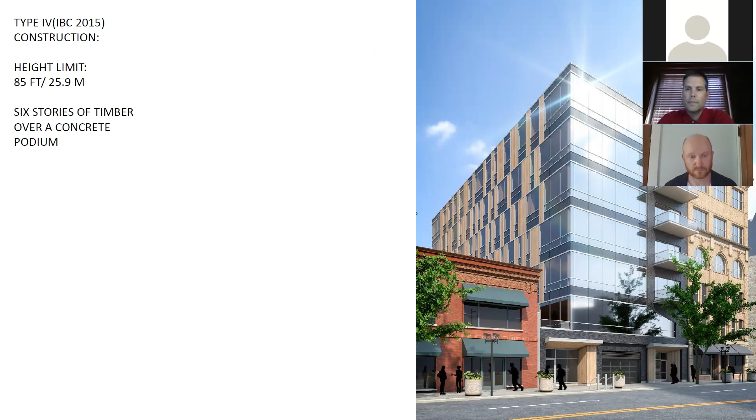In Canada, currently the tallest mass timber building in North America is Brock Commons, which is 17 stories of timber over a 1-story concrete podium. The stair and elevator cores are cast in place. That was a concession to the code officials in Vancouver. And basically, the way that Brock Commons got approved is that the timber is all wrapped in 3 layers of drywall, which we find to be less than an ideal solution because you can't actually see any exposed timber in this building.

The tallest mass timber building permitted in the United States was permitted in the state of Oregon in 2016. And aside from fire considerations, it's in Portland, Oregon, so it was in a high seismic zone. And so we benefited from some of the testing, which we'll jump into a little later, that was performed to get this project approved, and we're going to use some of that methodology on our project. Unfortunately, this project was in part funded by low-income housing tax credits, and it was canceled because the value of those credits sort of went way down at the end of 2017.

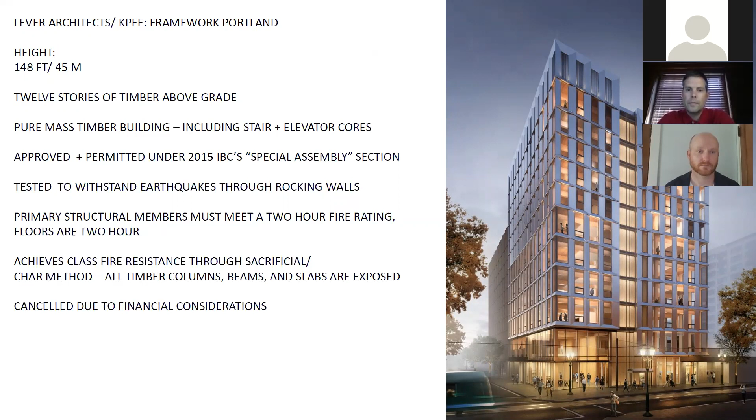Currently, the tallest mass timber building in the US is Carbon 12, also in Portland, Oregon. So this is 8 stories of mass timber, and we'll see some interior images in a moment. This is sort of the precedent that we are chasing in terms of the aesthetics on the interior.

This is the current tallest mass timber building in the world. It's in Norway. Please don't ask me to pronounce it, but it's 280 feet. It cheats a little bit because the CTBUH, the Council on Tall Buildings and Urban Habitat, allows architectural elements such as this crown to be included in the building height. That was added during construction so they could go grab the record.

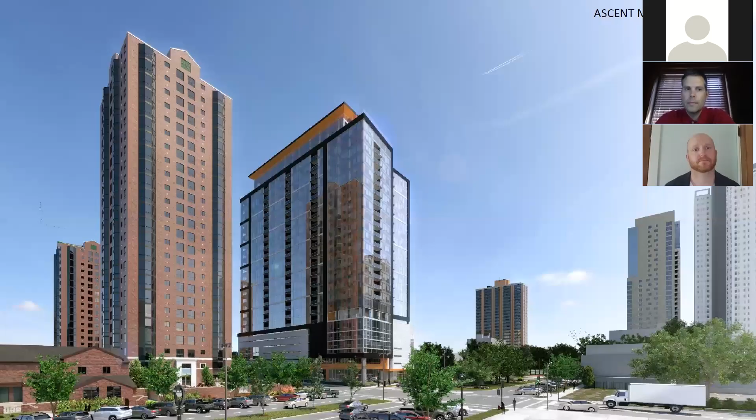And then this is our proposed project in Milwaukee, Wisconsin, Ascent, which is a mixed-use mass timber hybrid tower, total of 25 stories tall, 19 stories of residential, which we will get into, over a 6-story concrete podium.

Yeah, a couple of things that come up immediately when discussing a mass timber project is why. Obviously, there's an aesthetic aspect to it that's pretty much unmatched, which Jason already pointed out, and some of the renderings that you saw already kind of exhibit. But what are the real benefits to building with mass timber? Because there is a cost associated with it. It's not typical construction for what you typically see in this type of high-rise project. Typically you're going to see steel, you're going to see concrete, and we'll talk a little bit later about what the schedule impacts are.

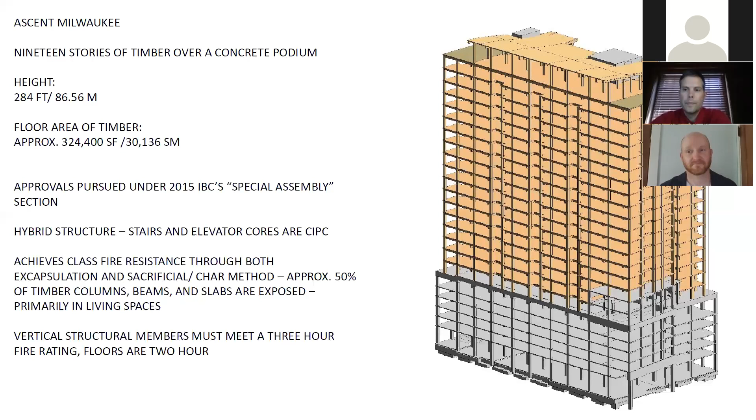And then we do have our 6 levels of concrete post-tension parking, and our core areas, our stairs and our elevator shafts, are vertically out of concrete as well. So when we say this is truly a hybrid building, you can kind of see the progression of foundation, deep piles through concrete to the mass timber. And that's a true hybrid construction.

And as Jason alluded to, similar to Brock Commons and some of the other projects that have these concrete cores, not only is it a structural element that really is quick and helps with the construction sequencing, it also allows for the egress paths from the highest point of the building to be encased in concrete as somewhat of a concession to the AHJs, in that they prefer having that concrete stair and egress path.

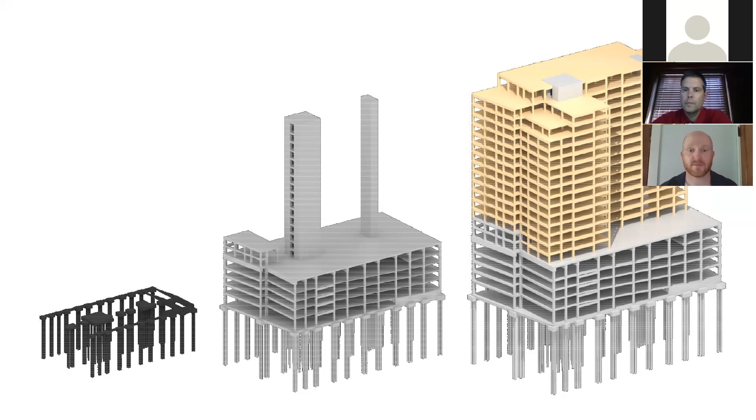There was a discussion at some points of having wood as the vertical shafts for the stairs and elevators, but we quickly went away from that, knowing that it was frankly an easier conversation with the AHJ from an egress standpoint, and from a constructability standpoint, to get our tower crane through the concrete and then into mass timber. Sequentially, it just made a lot of sense to do it this way.

So we'll talk a little bit about the timeline of this project. Our interaction with the AHJs has been extensive. Our firm was directed by the client, New Land Enterprises, to pursue a mass timber high-rise on this site.

They had previously had a 19-story concrete building approved on this site. It was canceled due to the Great Recession. So what we did is we immediately came up with a concept within 60 days from that directive, and then we presented it to the Department of Neighborhood Services Commissioner and the downtown alderman.

Because the Department of Neighborhood Services commissioner is appointed by and reports directly to the mayor of Milwaukee, and his department supervises all plan examiners and all building inspectors. In the first of many cases of the stars aligning, we presented this in May of 2018. We learned that the commissioner has a forestry background and was acquainted with the technology and was an enthusiastic supporter.

So later that year, he directed his staff to start working with us on trying to figure out a path to approval. So we gave our first presentation to staff, summer of '18. The project was still under wraps at that point. In fall of 2018, we unveiled it at the Council of Tall Buildings and Urban Habitat World Conference in Dubai.

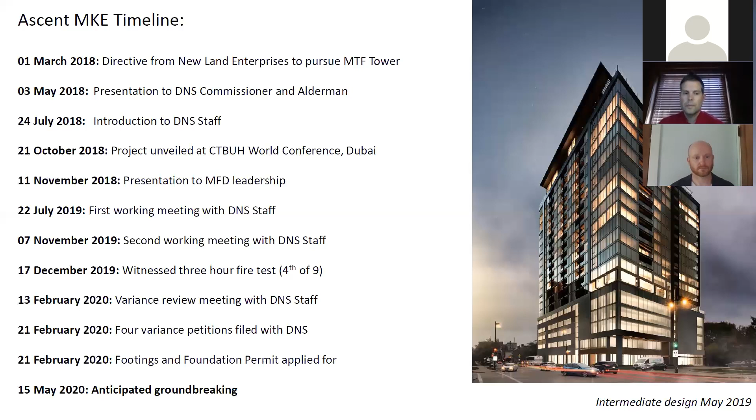We finally had a final variance meeting with DNS staff early this year and filed our variances. And we are currently working through the variance approval letters and a footings and foundations permit. And I didn't update this slide. We do hope to break ground in August.

Our meeting with the fire department came on the heels of an event that was unique to Milwaukee, a tragedy. Fortunately, they're rebuilding this, but in 2018, the historic Trinity Church on the west side of downtown Milwaukee was subject to a 4-alarm fire. And basically what we learned when we met with the fire department is that the 2 chiefs that we met with were actively there fighting this fire.

So you can see they char on the exterior layer of the timber. The char impedes the flow of oxygen into the structural heart of the member and basically self-extinguishes the fire. That's especially relevant in multifamily buildings where each unit is its own compartment, effectively, separated from corridors and adjacent structure by rated assemblies.

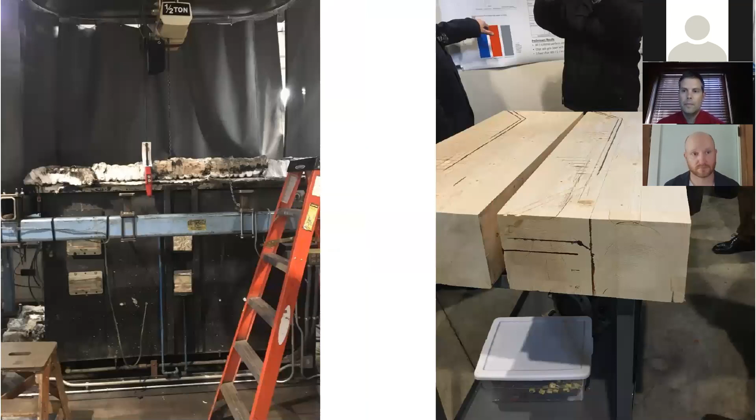And so on the left is an image actually taken into the burn chamber of the furnace while they're conducting the burn. On the right are the 3 samples they had burned prior, 3 different species, and they all performed almost identically. So what they do, if you look carefully at the image on the right, is they then cut the remnants of the member into sections and see if enough structural material is left to support it after being burned for 3 hours. And what they learned is that the answer was yes.

One of the things that Jason mentioned before when he was talking through some of the renderings is how within the building, the objective is to expose as much mass timber as you can for aesthetic purposes. However, there are some utility functions that you still have to accommodate for. And what those utility functions actually allow you to do is analyze the structure and try to find some cost benefit in reducing the amount of fiber that you are getting and thicknesses of the fiber within the columns, the beams, and the floor slabs to lower the cost in those particular areas and then allow for more exposed areas.

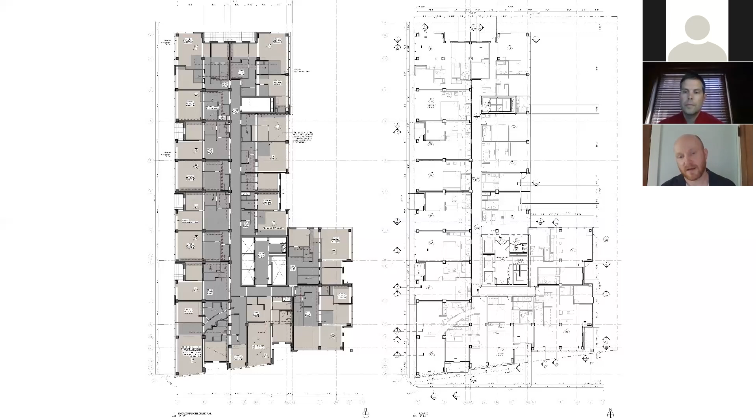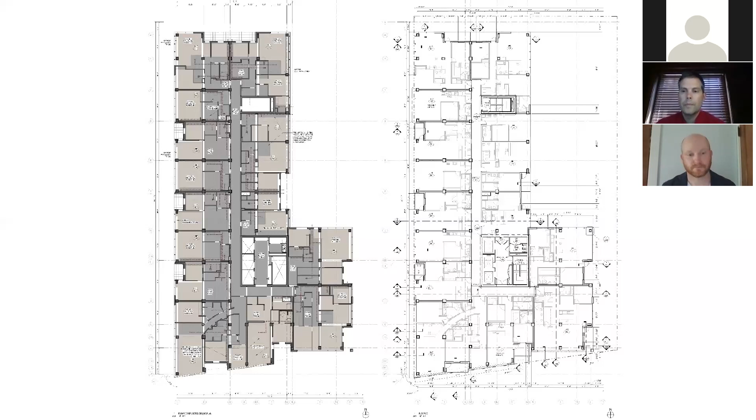And then, go ahead, Jason. Oh, the other reason for encapsulation of where we have columns and beams that divide one unit from another: because this is a luxury offering, sound transmission was a concern. So the additional layers of drywall help with the sound transmission between the apartments. So that's just another benefit of this hybrid system.

One of the big drivers for cost, as I mentioned before, in having areas that are concealed and areas that are exposed as it relates to columns and beams and where they connect, is the connection point. The connection details are so much more intense when you have exposed beams and columns, and those have to be assembled properly, and they have to have a special UL rating, and they have to be tested multiple times over.

But when you have these areas where you have concealed connections, you can see that in this particular detail, it's a very simple connection. The beams are loaded onto the column. There's a simple bolt connection through. Same with the floor slab, it comes and loads down, and it's very, very simple. This is a connection point where we are going to conceal and wrap the beams and the columns and the floor slab with drywall. And that's how simple the connection detail is in those areas.

Now, if we click to the next slide, you'll see the detail where it's exposed is extremely more intricate. The assembly and the complexity of this connection detail is vastly more complex. It's more costly. Everything about it screams money, right? I mean, you can just see it by looking at the two different details, and that's the difference.

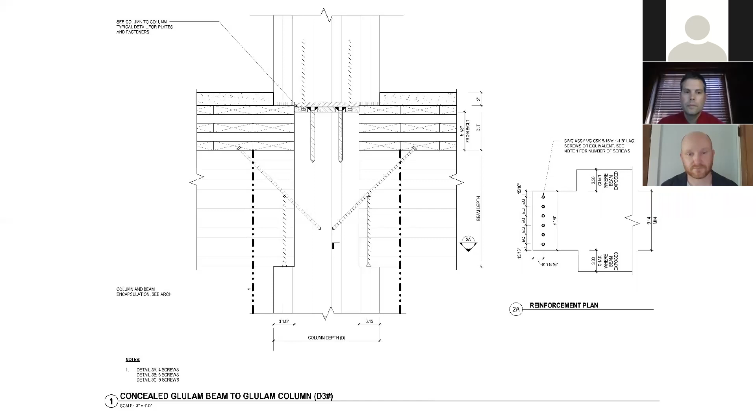So I would add this, if we go back one, look carefully at how much smaller the column coming into the underside of the beams is. That's because those heavy dash lines indicate the 3 layers of drywall on either side. So the fiber or the timber material, as Adam mentioned, in the columns and beams is extremely expensive, and the connection here is far less complex.

But it should be pointed out, I had mentioned we needed 3 tests. The reason we use this connection is that this connection has to be rated for 3 hours in a fire. And this is what they were using at that framework project I referenced earlier in Portland. So at the end of the day, we used the connection that had already been tested.

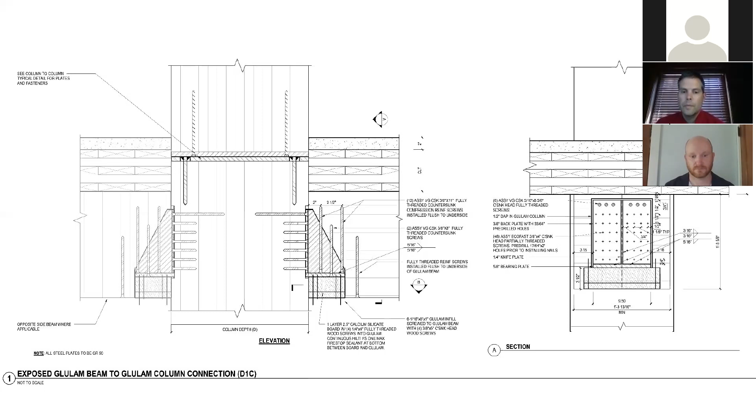And just as an aside, the 3rd test was specific to the manufacture of the cross-laminated timber slabs. That was just because the supplier had not had their product tested per US standard. They did complete that test in San Antonio in March, and it did pass. So of the 3 fire tests that were required, the team did 2, and 1 was a prior approved connection.

And then the other thing we had to look at very carefully is, in a high-rise residential building, how does this interact with the skin of the building as opposed to a concrete building? And what we found at the end of the day was it's largely the same from a detailing standpoint. One major change is that we had to be very careful about waterproofing the ends of the slabs in particular, because every other layer, its end grain is exposed. So they are sealed in the factory, but we have an extra layer of waterproofing at the end grain in particular. But other than that, this details out much like a traditional post-tension concrete building.

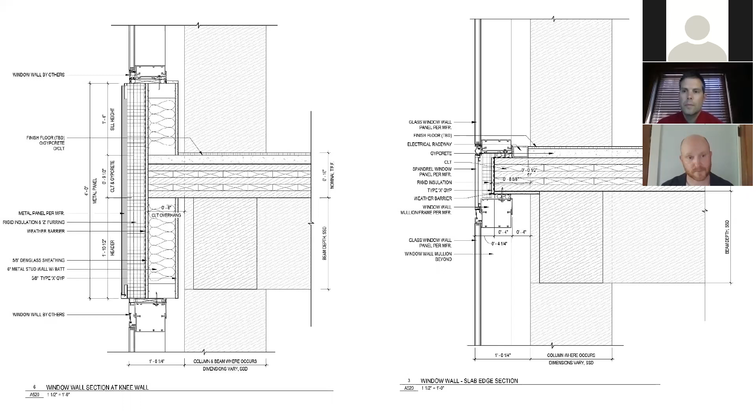Yeah, Jason, one really good point on that too is that as the building's going up, one of the biggest concerns, obviously, is the water as it gets on the wood. So as part of the overall assembly of this, we actually have specific carpenters assigned to sealing the seams as the floor slabs are going up, so that there's a roof mastic, basically a roofing compound, going over every seam as soon as they're being installed, so that no water can leak down, because if the water would ever leak down and stain the underside of that CLT floor deck, the repair cost for that is significant.

So having workers that are truly dedicated to literally water vacuuming and sealing every seam immediately as the floors are assembled is something that's very critical, as well as, as Jason mentioned, sealing the ends of the slabs on every floor.

But really, from an assembly standpoint, the amount of workers that are up on any given floor is substantially reduced in mass timber construction, because, for lack of a better description, it is tinker toys. As Jason likes to say, you get up there and you whack it with a rubber mallet, and the things go together. It sounds really simple, but it actually is. You can see it in the picture to the right. The carpenter is literally just sliding a beam onto the connection, and it is pretty much that simple.

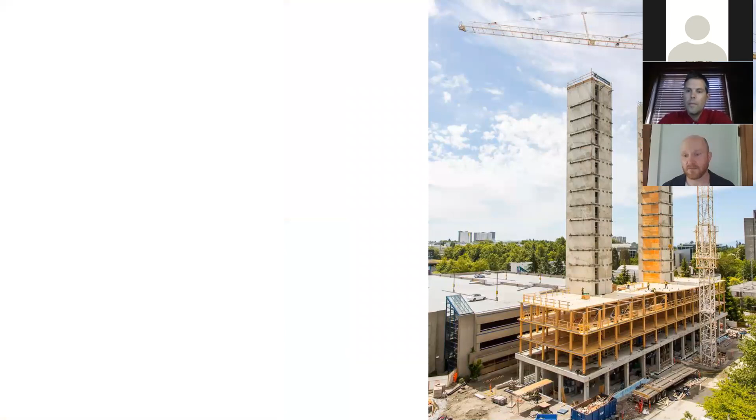As mentioned before, this is an example of exactly that kind of hybrid construction. You can see at the lower floor, it's a concrete podium with the mass timber floors going up and those concrete stair shafts and towers going up. This is, let's just say, a very small example of what you'll likely see in the Milwaukee skyline about this time next year.

So this is a perfect kind of picture of what we can expect and how the sequence of materials will be. But the tower crane at this point on this picture, very similar to our project, is fully dedicated to the timber construction. And so really that's kind of how the sequence goes. The concrete gets done, the towers get done, then the wood goes, and that tower crane is purely dedicated to each of those tasks at any given time.

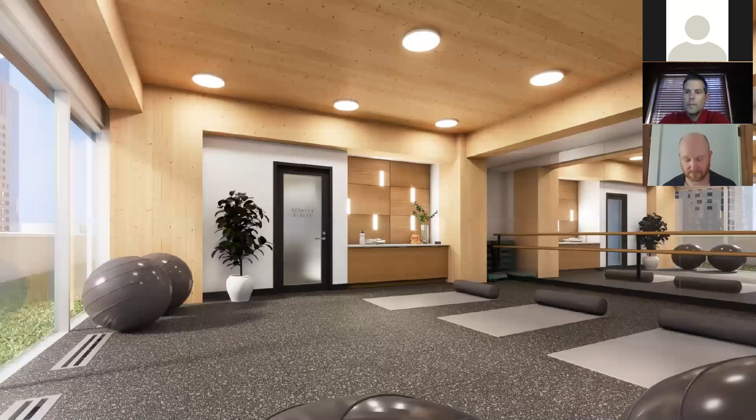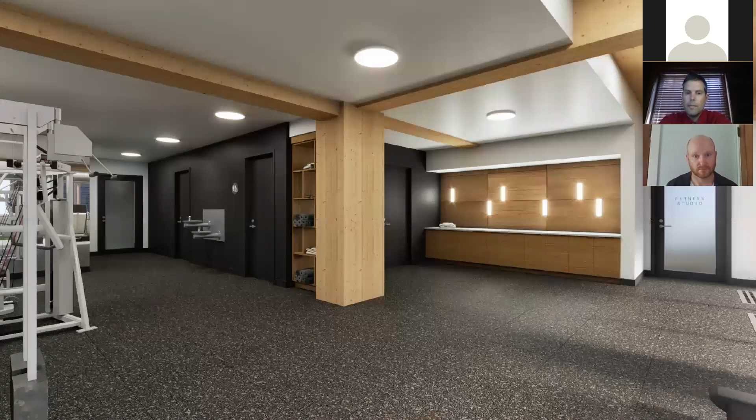So as we start to wrap up, going back to the aesthetics, these are brand new images based on the final construction documents. As I think Adam mentioned, we have a 7th floor amenity area, including some fitness. And so here, as wherever else we have timber, we expose as much of it as we can. And then a different shot in that fitness room, you can see we are concealing mechanicals in these drywall soffit areas. In this case, we have apartments above this space, so we have plumbing coming down through there, and it's snaking its way through.

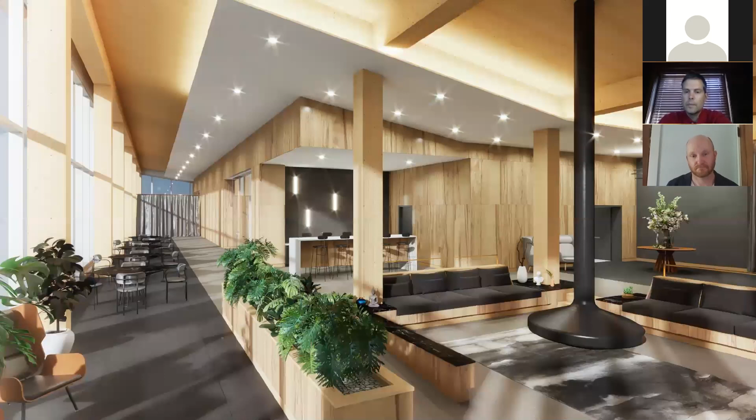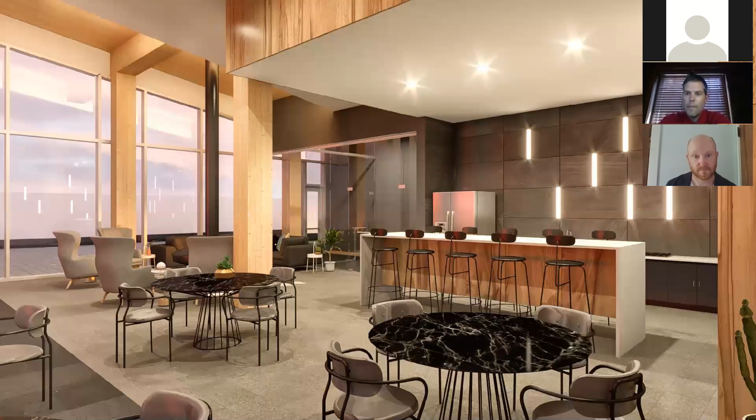And then on the 25th floor, which is all amenity, we again expose as much as we can, and then we achieve a very tall western wall with timber going all the way up, and the ceiling slab is exposed. And we hope to light it up at night and make it a bit of a beacon. So again, another shot of that 25th floor amenity level and the aesthetics of the space that the team put together to achieve what we think is a totally unique offering.

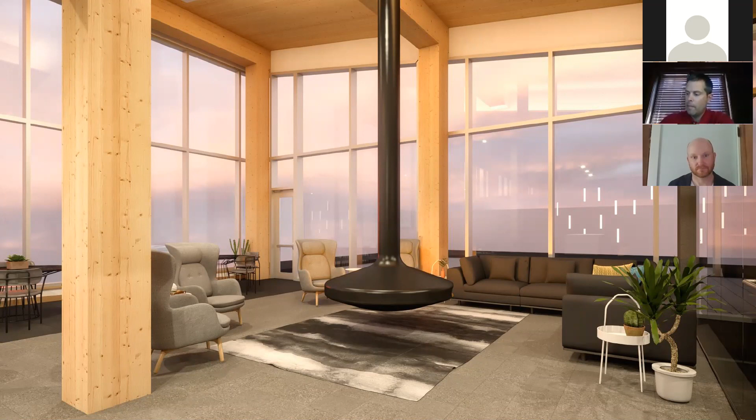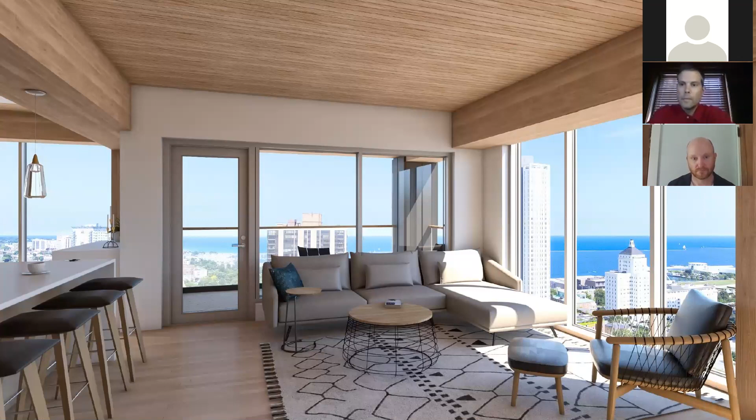And then this would be the northwest corner of that space. So panoramic views, 20-foot tall glass walls, exposed timber. We don't think there's anything like it in the world. And then here's a slightly older shot, but again, the aesthetic inside one of the dwelling units. This is the southeast corner of the building. So obviously Lake Michigan views, exposed timber around the perimeter as we've discussed. And then if you look very carefully off to the left, you can see a little bit of drywall appearing above the kitchen, as it will.

And with that, that's our presentation. Thank you.

Guys, thanks a lot. That's really interesting stuff. You guys have put in a ton of work, and what's really fascinating to me is that you guys benefited from some of the testing work that was done for some smaller projects, and you guys are really kind of at the forefront of setting a baseline that will be used for years to come as mass timber becomes more and more adopted in construction. So fascinating stuff. I can't wait to see the start of the work on this.

And then next year, maybe around this time, a little bit later, enjoy the 25th floor with both of you guys after we see things lit up.